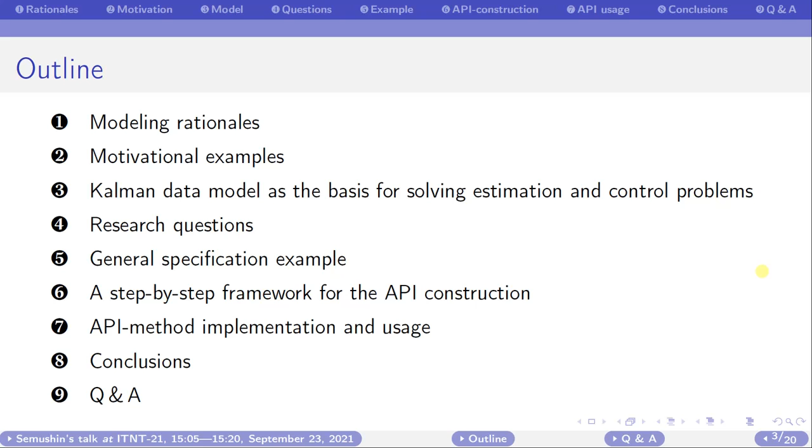However, when the model is to operate as a filter, its original performance index, OPI, remains totally inactive, in other words, non-operational. This is because the filtering error is a priori fundamentally unavailable. Our research looks into the following. How can one switch the OPI into the active mode on the filter optimization level for the adaptive stochastic data processing? The outline of our presentation includes 9 points. They can also be seen on the top bar of each slide.

To begin our discussion, here are some interesting statements about models. A model resembles the original just as well as a map mimics the globe. Leon Brillouin. Models should not be true, but it is important that they are applicable, and whether they are applicable for any given purpose must of course be investigated. This also means that a model is never accepted finally, only on trial. George Rasch. Truth is much too complicated to allow anything but approximations. John von Neumann. And finally, all models are wrong, but some are useful. Box.

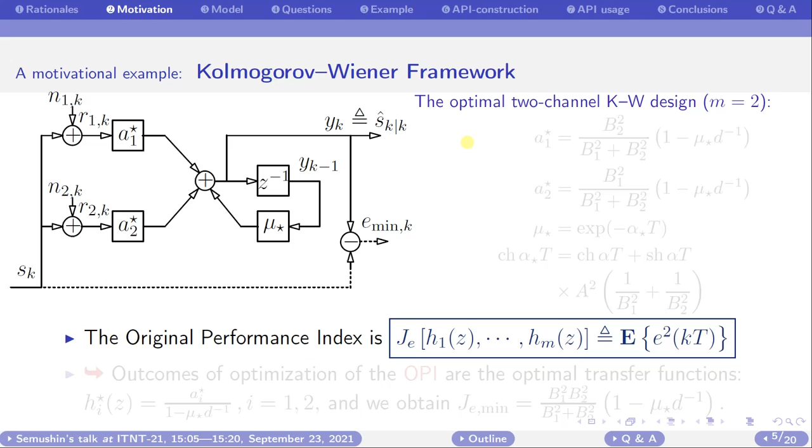But what about the motivation? Consider the well-known Kolmogorov-Wiener multi-channel filtering problem. Let the correlation function of the signal be the single exponent, and all the channel noises be independent white noises. The original filtering criterion is the mean square error. If the number of channels is 2, the minimum of this criterion is J minimum, and it is given by two optimal transfer functions. In case of a single channel, the solution is even more transparent and easy to use.

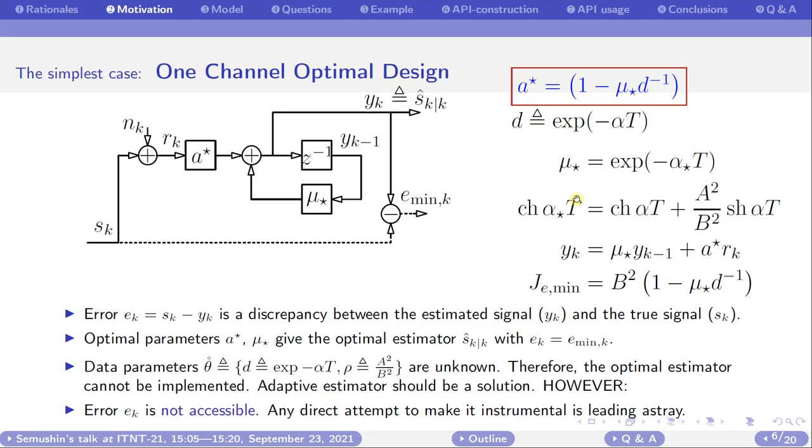But what is the main point here? All the formulas for the optimal solution are available. However, the solution cannot be realized when the parameters of the problem are unknown. A filter adaptation is needed. But filter adaptation by minimizing the original criterion is not possible, as the filtering error is not available. Let us look at this case in a little more detail.

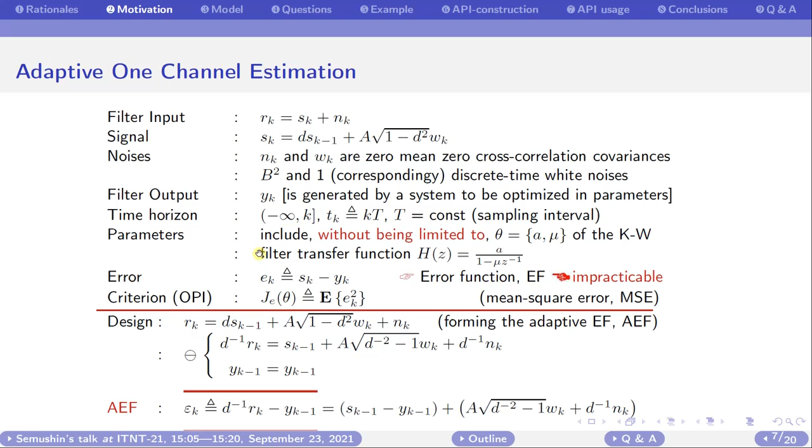We have the filter input equation and the signal generation equation. The latter is the recurrence equation of its shaping filter. Let us substitute it into the input equation, multiply by d to the power minus 1 and subtract the delayed output. We get the epsilon value, which has two terms. The first term in epsilon is the filtering error, delayed by 1 unit of discrete time. The second doesn't depend on filter parameters. It is not correlated with the first term.

Squaring and averaging, we obtain our key relation, API equals OPI plus const. Available API is the mean squared epsilon. Not available OPI is the mean squared error. Both have one and the same minimizer. It is the optimal filter parameter.

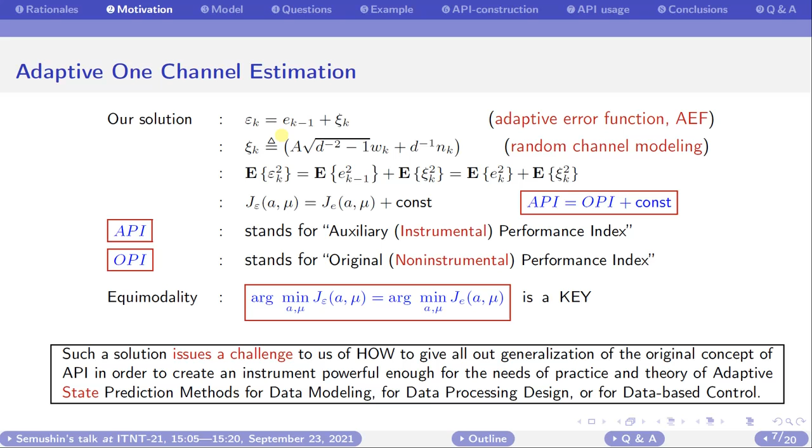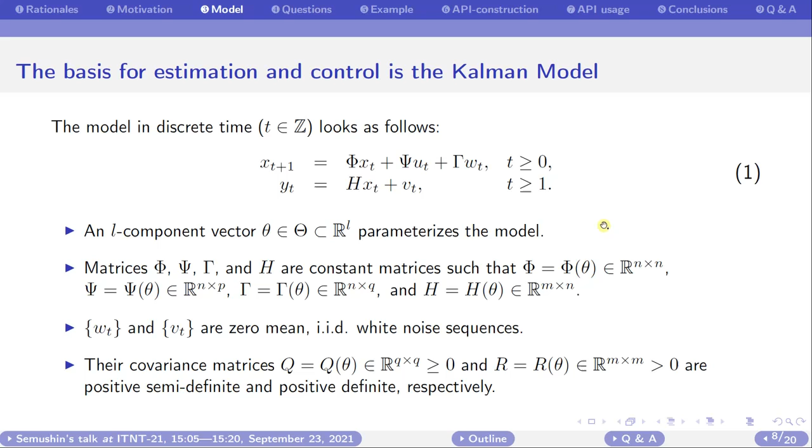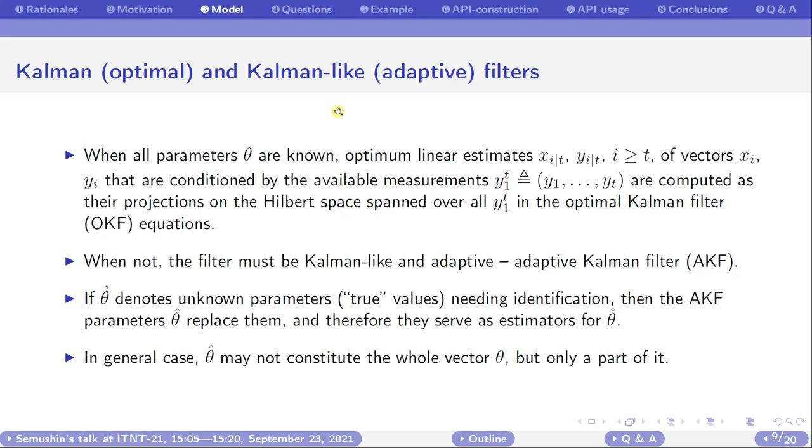We try to get such result for the general case of a linear discrete time stochastic model known as the Kalman model, equation 1. An L component vector theta parameterizes the model. When all parameters theta are known, the optimal Kalman filter may be built. When not, we have to move to the adaptive Kalman filter, which is Kalman-like in structure. The original criterion is minimums of each of the quadratic indices 2 of prediction and filtering errors. They are inherent to the predicted and filtered estimates for states x t plus 1 and x t correspondingly.

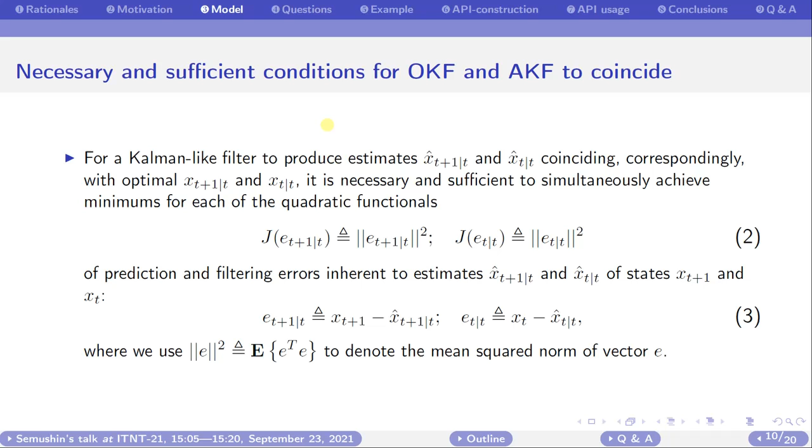Remind that both errors 3 are unavailable. As mentioned, it is because of the inaccessibility of these errors that the Ljung's method dominates in the theory and practice. Note that it would be meaningless to minimize the difference between the input and output of the filter by this method.

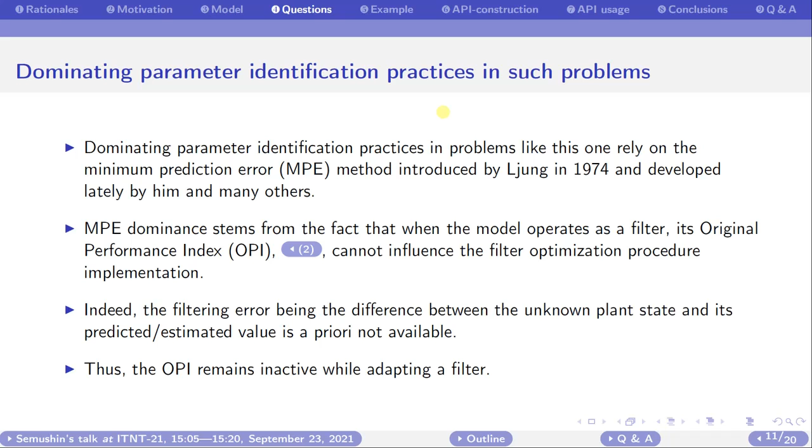From here, we ask the main questions. Can we construct a novel filter adaptation algorithm to identify unknown parameter true theta by converging the estimated theta to the true theta without a bias? Can we offer a novel algorithm for detecting the moment of a sudden change in parameter true theta? And can both algorithms be built on a criterion-based tool, call it API, that would be equivalent to the non-operational OPI? The third question is the key one for our research.

To demonstrate our solution, we executed it in detail for the practical task of processing data from the field of navigation. Since we want to do all calculations manually, we limit the dimension of the data system to 4.

Accordingly, the platform INS instrumental error model in our example contains the following quantities: delta Vx, error in indicated velocity; beta, platform misalignment error angle; m Ax, random accelerometer bias along axis X of the platform; and n Gy, constant gyro drift rate along axis Y of the platform.

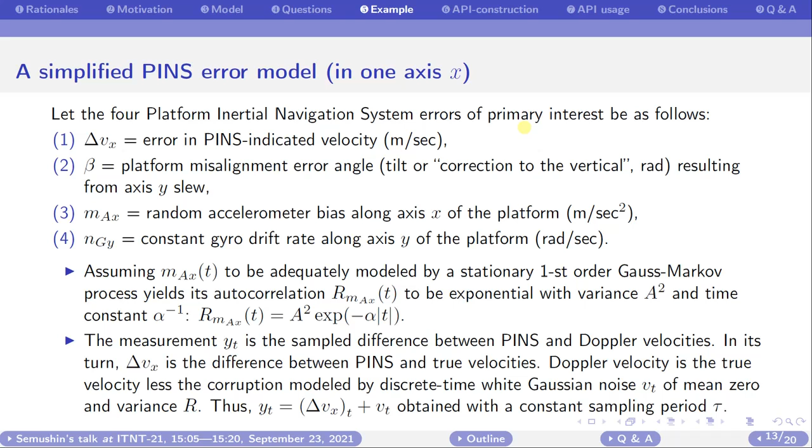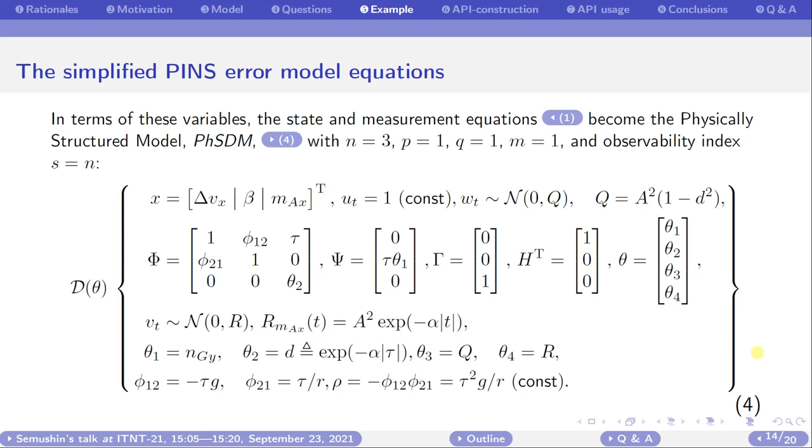In terms of these variables, the state and measurement equations become the physical structured data model with the given dimensions and the observability index S equal 3. Offering our solution, we highlight the following 7 steps.

Introduce a predetermined set D of data sources D of theta, step 1. Identify D of true theta in D to be identified, step 2. Change from D of theta to D star of theta, the standard observable data model, step 3. Define the target model, standard observable innovation form of the optimal Kalman filter, step 4.

Introduce the hypothetical set M star of CCMs, concurrent candidate models. Each candidate is obtained when the model parameter takes the jth value at the jth repetition of some iterative procedure in search of the optimal value true theta. Step 5. Consider a candidate model as the principal part of adaptive Kalman filter and supplement it with the k step ahead predictors.

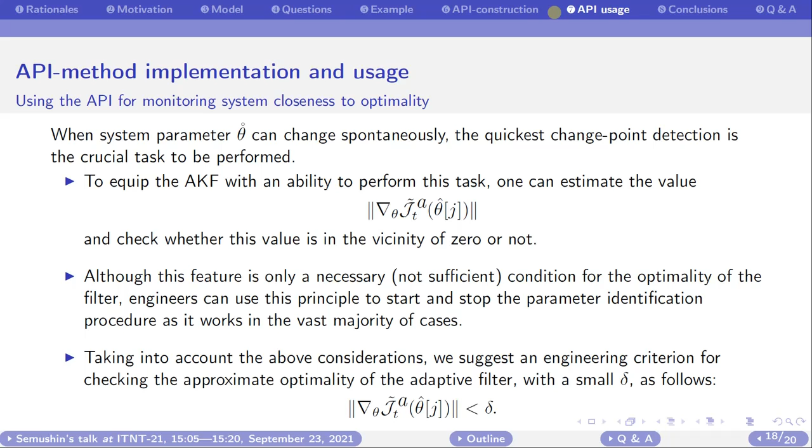Using the API for monitoring system closeness to optimality. To equip the adaptive filter with an ability to perform this task, one can estimate the norm of gradient of the API and check whether this value is in a vicinity of 0 or not. Although this feature is only a necessary, not sufficient condition for the optimality of the filter, engineers can use this principle to start and stop the parameter identification procedure as it works in the vast majority of cases.

Task 2. It is the recognizer-launched estimation of the unknown parameter value by iteratively calculating an estimated theta value. Task 1B. It is the recognition of the event when we think the iterative process has resulted in a theta star which is close enough to the true theta, and discontinuing this adaptive estimation process. Task 3 is started. Task 3. It is the consequent acquisition by the control system feedback of the finally estimated value theta star. Task 1A starts again.